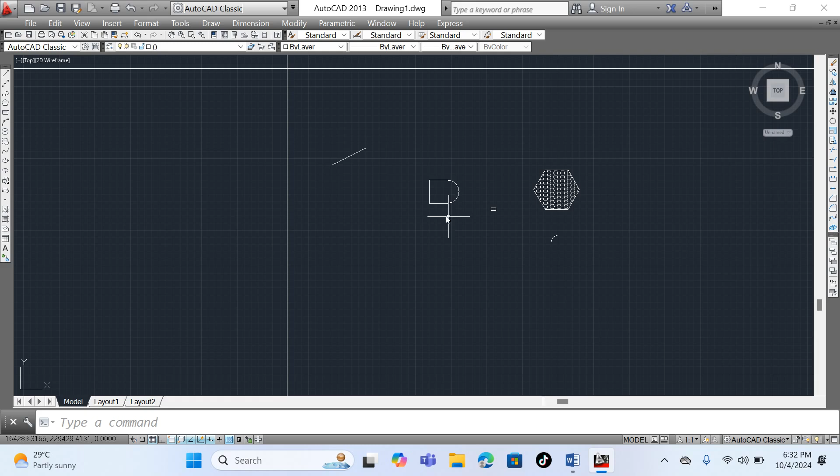Now, to erase an object, we shall select the object and then click on erase here, and you can see it's gone. Alternatively, we can select an object by clicking on it, and then we hit delete on our keyboard, and there it's gone.

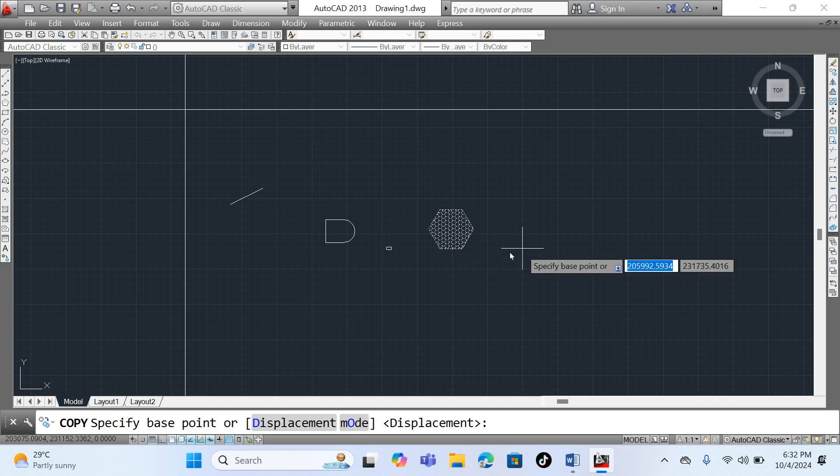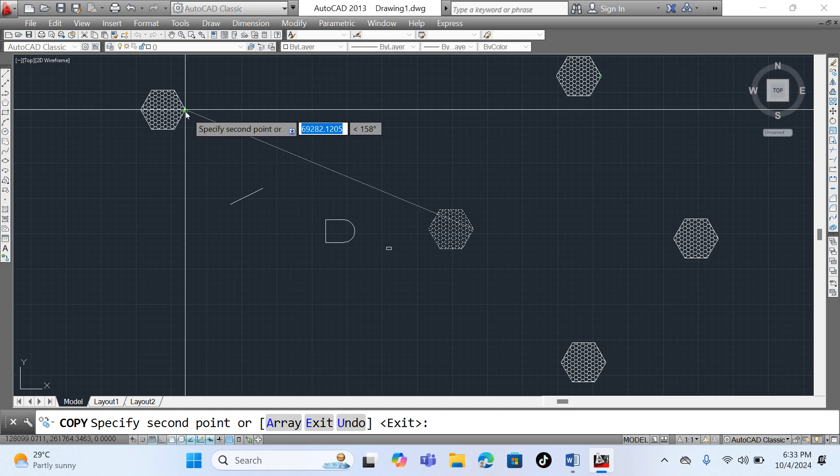The next one is to copy. To copy this object, for example, we shall select it, then click on copy. We pick from a particular base point and then drag to where we want it. Remember, copying means the original will remain. Wherever you click, it will be copied to that location. I'm clicking, that one is there. I can click also here, it will be there. So that is how we copy.

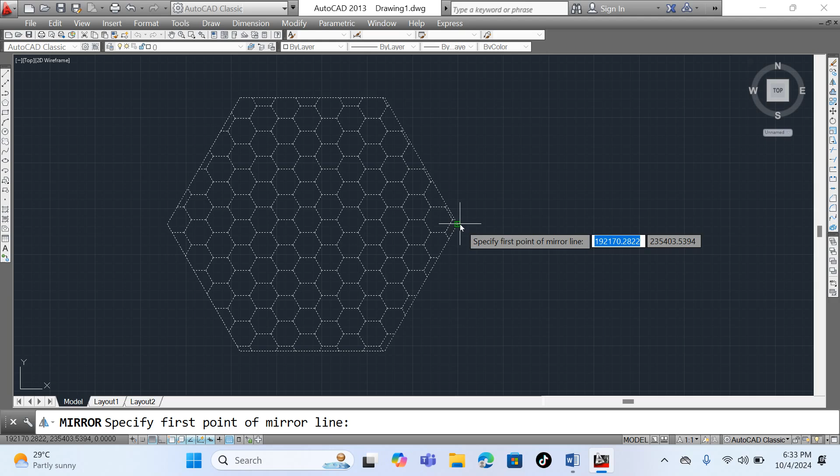Now to mirror, we shall also select the object like that. We click mirror, and it says specify the point of mirror line. I want to mirror directly from this corner. I'll click on that corner and move vertically upwards, and it gives me that, and I click, then right click and say enter. So that is the mirror.

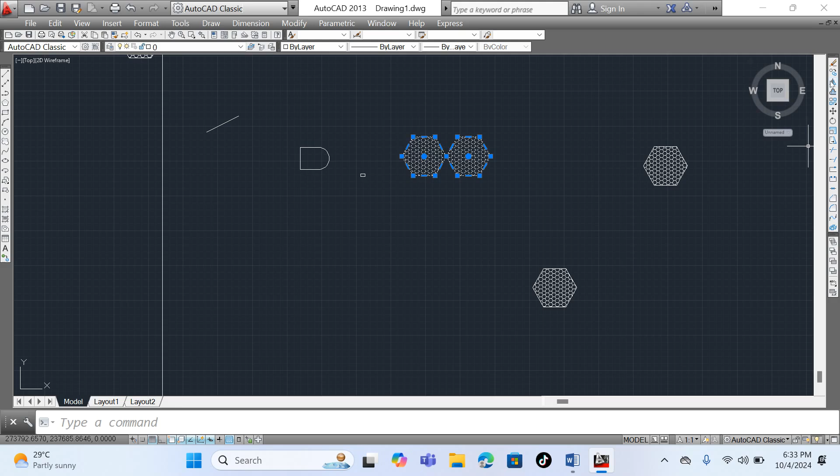We can repeat this for these two objects that we've created. Click on them, go to mirror, and then I'll click the mirror line here, make it horizontal. If you want it to be perfectly horizontal, we lock the ortho mode here. You click on it so that it's active. There, we are able to mirror those objects. You right click and enter.

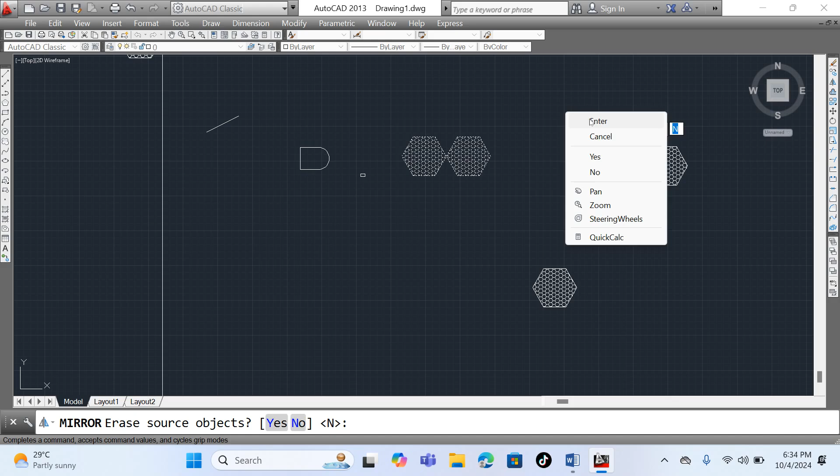The next is the one for offset. What we are going to do here, we shall draw a rectangle which we are going to explode. We shall also offset it, and we shall trim and extend.

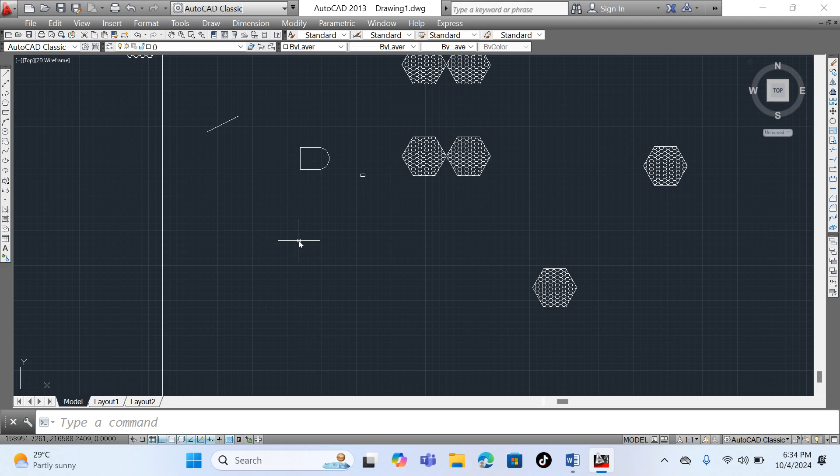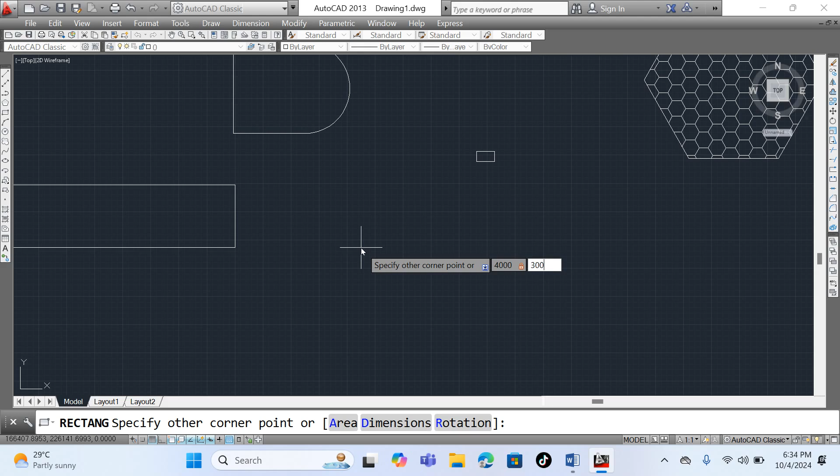So I'm going to draw a rectangle here by clicking on the rectangle item, and then I draw a rectangle of size by clicking here, size 4,000, tab. Then I enter the width as 3,000, enter.

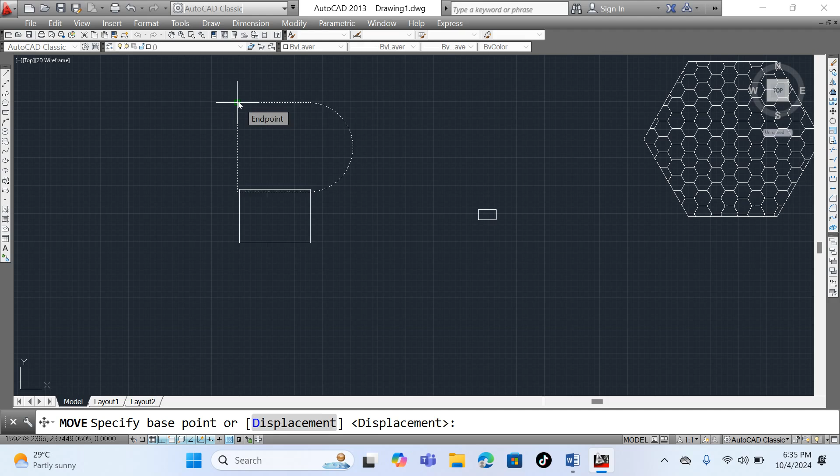It has gone onto the other objects. We can now move this one a bit. We move this object by clicking on that, then we select move here, then we click on this point. We are specifying the point of movement, and we drag it upwards and click there. So this is our rectangle.

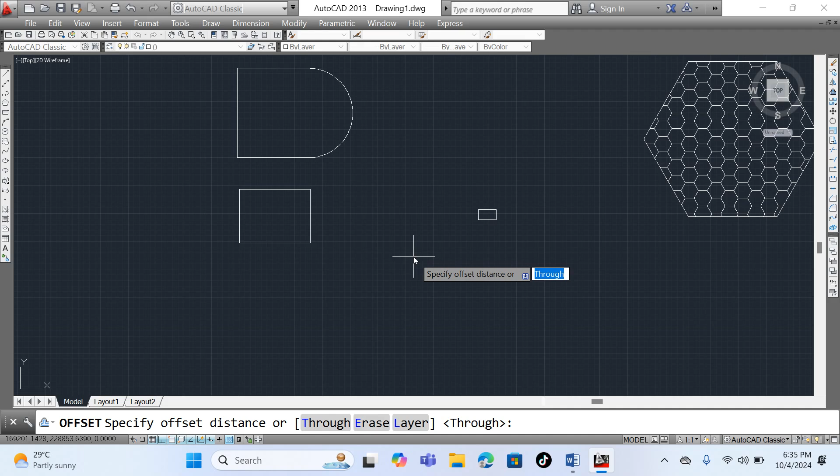To begin with, we are going to offset. We shall click on the rectangle, then click on offset. Once we click on offset, it comes in saying specify offset distance and through. We shall click enter on our keyboard, and then we describe the direction, whether we want to go outside or inside of the rectangle. It's necessary to specify the direction correctly, because you might want to maintain the dimension of what you had drawn at first.

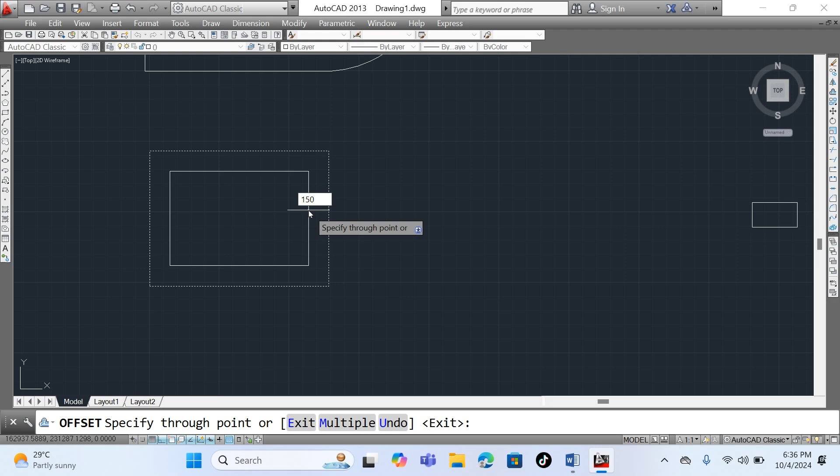Say if it was an external dimension of a room, so if you are now offsetting the wall, you take it inside and put the wall thickness. For example, we can use a wall thickness of 150. So we shall type 150 on our keyboard and press enter, giving us that, and we escape. Now I'm also going to show us how to explode.

Now, when you look at this rectangle, when you click on it, it selects all four sides at once. So it moves as a unit, it's a rectangle. Even this one, when you click on it, it's a rectangle. Escape.

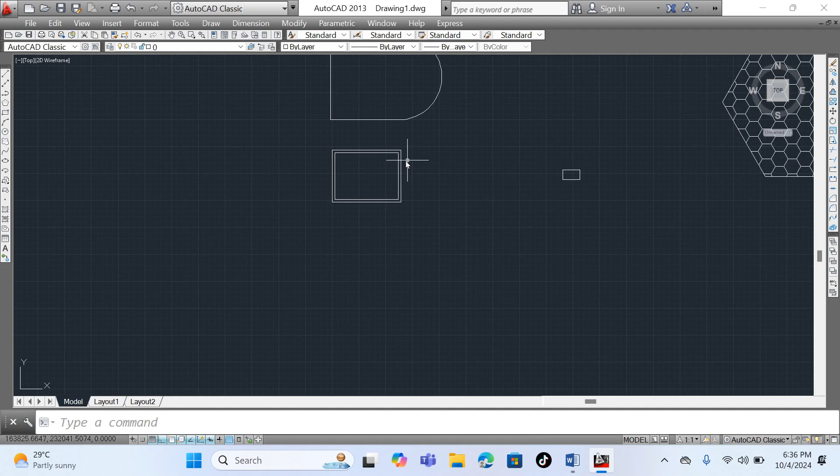Let me right click and enter to abort that command. Now what we shall do is explode these rectangles so that we are able to edit each of the sides individually. So to explode means instead of having this rectangle as a unit, as a compound object, we want to split it into component lines that make it up.

So to do that, we shall select that rectangle. We shall also select this one because I want to explode both of them. Then we come down here to explode, click on it. Once we do that, we are able to select each of these lines individually, not selecting the whole rectangle. And then we shall enter.

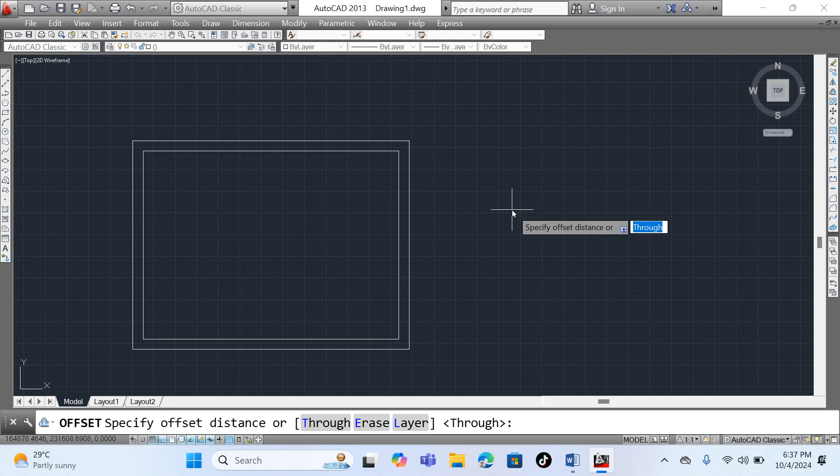Now that we have exploded, I'm going to offset certain distances because I want to create, say, maybe this is my pit latrine. I want to create 2 rooms of the pit latrine and other things. So what I will do, I will offset here. I come into the workspace and press enter, or you right click on your mouse, enter.

For the wall now, we need to put it at 150, and then we enter. We click on this.

For practice, I'm going to offset it a distance inside here. But remember, the direction must be clearly specified. If you bring it inside, it comes inside. If you take it outside, the other side of the line, it goes there. So mine, I want it this side.

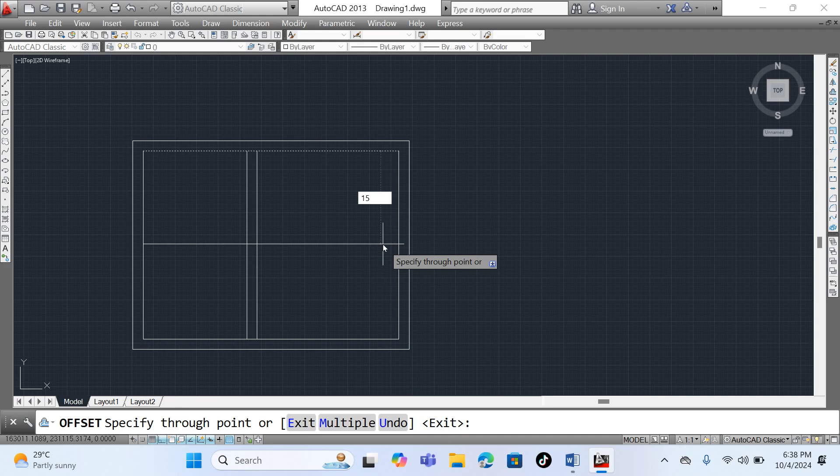So I'll now enter there, 1500, then I enter, and I need another wall. I'll click on this of 150, and then I enter.

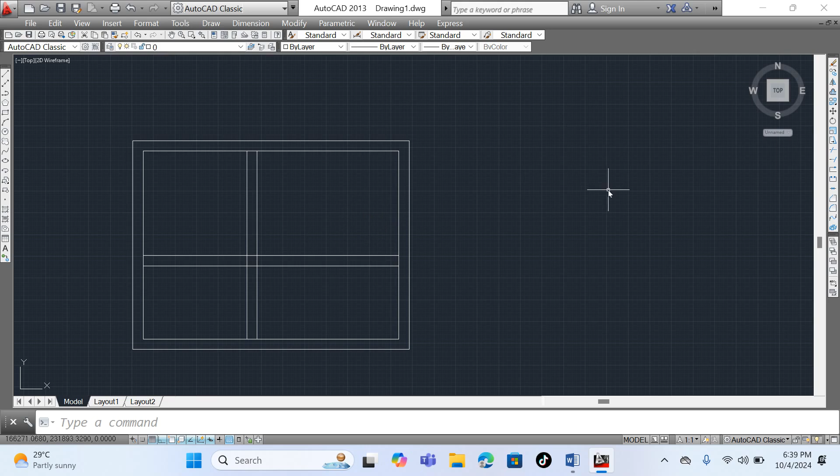And I will escape. Now the other thing is, if you want to trim, we shall click on trim here, select it and click on it, come into your workspace, right click on your mouse or hit enter on your keyboard. One of those would be able to help you.

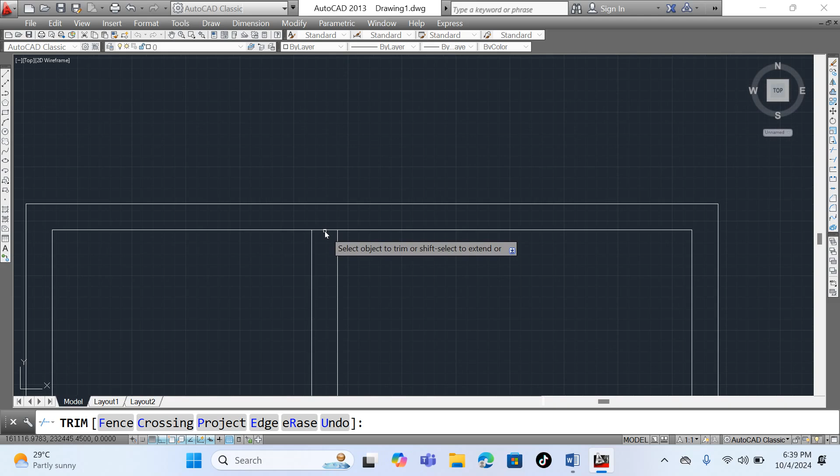So I'm going to right click, and then probably I don't want these lines, so I'm going to trim them by clicking on them. I will also click here to trim that part, click there. What I'm doing is clicking on a particular line that I want to trim. Even this one I want to trim, I will click on it, and there it's gone.

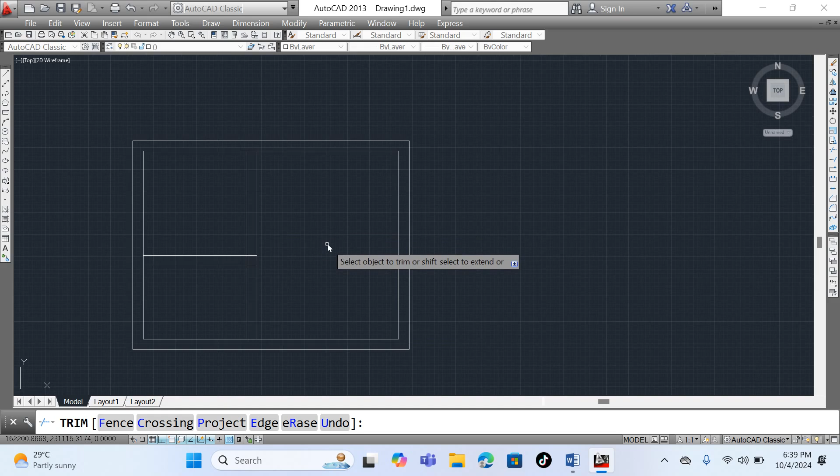If I had done a wrong thing, I would press Ctrl Z to undo, and whatever I did is going to come back. Now if you want to extend, first enter that, you click on extend, right click on your mouse.

And then I want to extend this line to come back up to the end here. So what I will do, I will click on this line, I also click on that line. If I want it to reach this one, I will continue clicking on this and that. That is how we extend.

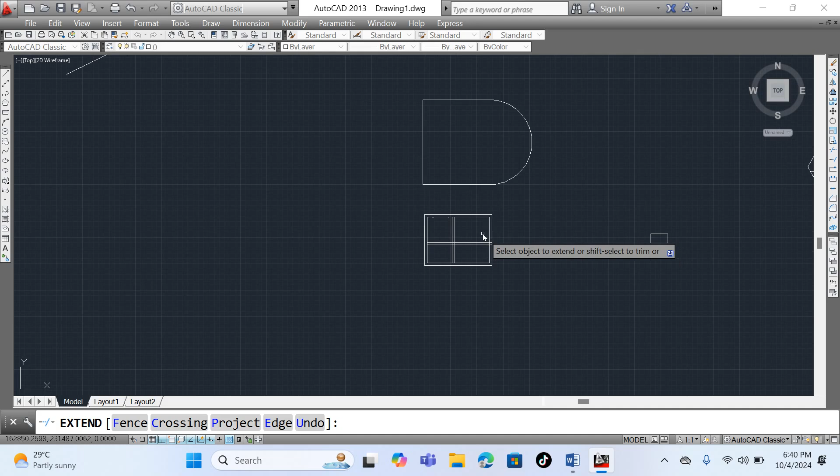And I think that is that. Maybe one thing I want to repeat is copying. If I want to copy this rectangle, we first enter to abort that command. I will select the whole rectangle, then I say I'm going to move.

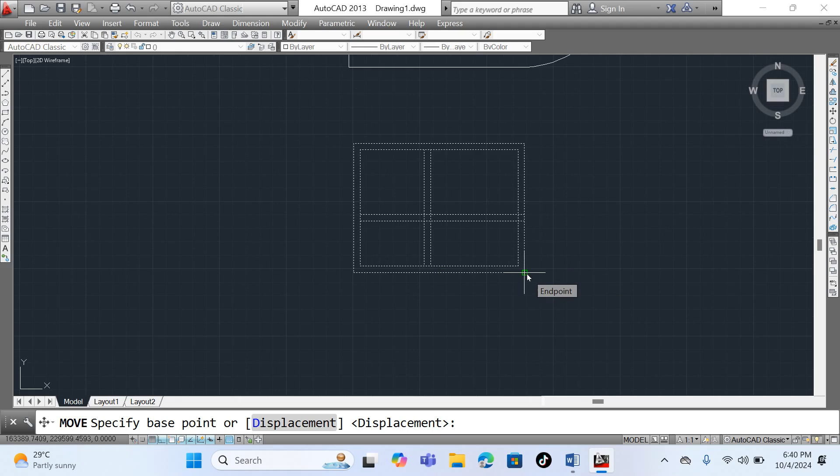This copy is done already. I'm going to move, I'll pick it from here. Maybe I want to pick it from this corner. It's good to choose a particular point of reference that you're going to copy your item from.

So I'll copy from here, and I want to put it up to there, but I'm going to remove the ortho mode because it's restraining me to move only in vertical and horizontal direction. So I'm going to paste it there. And that is it for copying.

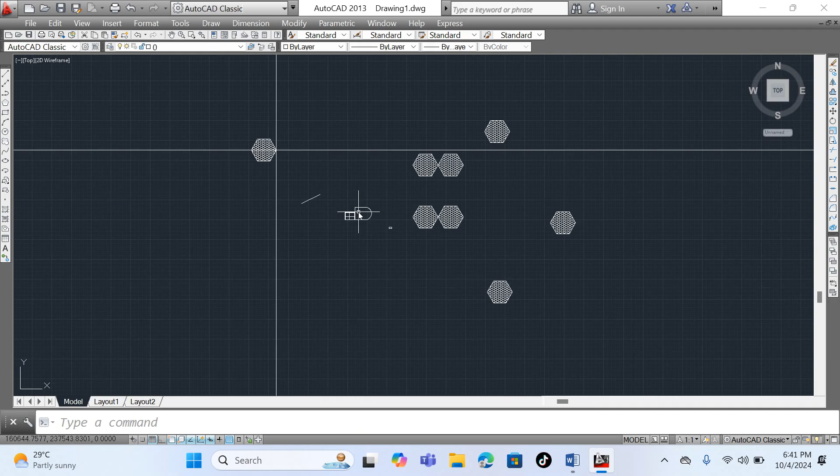If you want to move, select the item, and then we click on move, and select also a base point, and then you move the item to where I want. Probably I want it to be here, I will click there.

So note that moving removes the item from where it was originally to the new position where you have moved it. But for copying, it means you create a copy, the original remains, and you make another one. Wherever you click, it will be created.

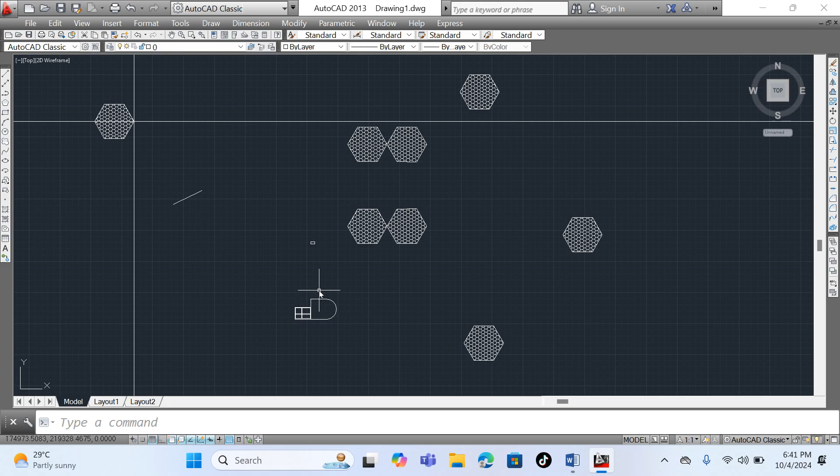That's it about the modify toolbar command. These modify tools are fundamental for adjusting building drawings in AutoCAD. Mastering them will enhance your ability to efficiently edit your design. Keep practicing. Bye.